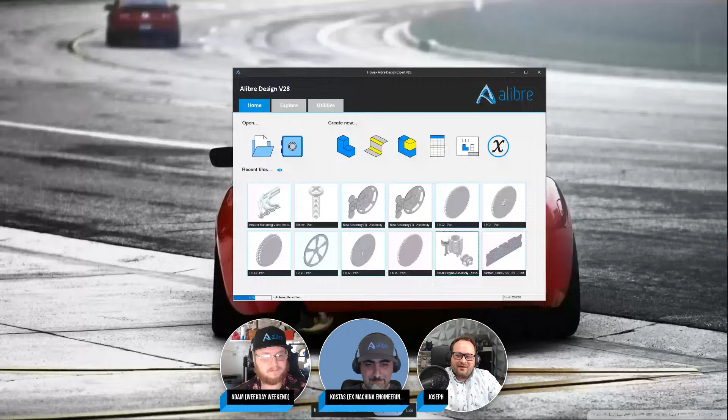Love that one. Let me turn off my phone, and also share my screen, unless you've got a good one, Adam. Either way, nope, you are the surfacing king. Well, here we go, pulling up a model here. I'll pull up a model of a simple engine. With all my streaming on my machine, it's running a bit slower for the first startup here.

Well, anybody heard any good jokes lately? The one I told in the last stream wasn't quite as funny as I'd hoped. I don't know if it's family friendly, but I can give you a machinist joke: a machinist walks by a hole and he says, 'I tap that.' I have jokes, but that's fine. The ones I have are a little inappropriate, let's say, not exactly brand appropriate.

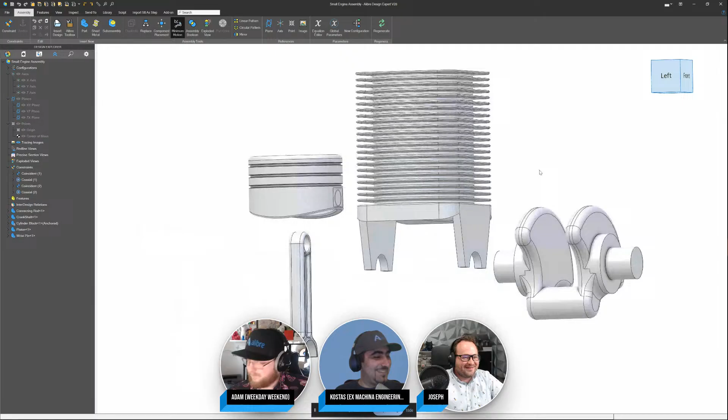While this loads here, I want to ask the chat. I saw Sweden, which is an interesting spot. Anyone else from anywhere cool? I'm here from Crete, Greece. There you go. I take that for granted. You should, as well, you should. Crete is awesome.

Okay, I finally got this up here, so enough stalling on my end, right? If I start building constraints on this, and of course I just go click the wrong edge, so if I start adding some constraints where I click some simple things and I go to position something, there we go.

Let's pretend that when I move this crankshaft in place, I've got some conflicting surfaces. One thing I can do is when I select a surface, and if this is blocking me from selecting this surface, I know it's not, but we're pretending it is, I can right click and hide, and that stays selected so I can still apply that constraint. Then when I'm done, I can simply unhide and get that constraint. So that's kind of my go-to way of getting around when something's in the way. Hopefully that's helpful, let me know in the chat if you guys have any other approaches as well.

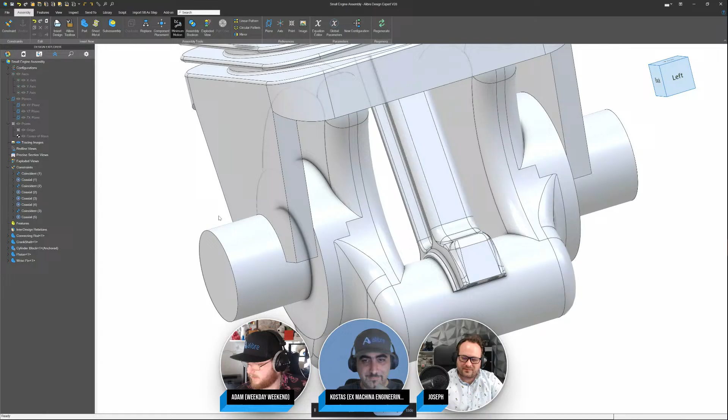No, I think that might cover it. Let us know if that helps you, if that answers your question.

Yeah, because this is such a common, ubiquitous thing, right? Sometimes things just get in the way of other things in an assembly.

Can I also just say the trick that I use to select behind? So actually, it's just simply changing the view to shaded with hidden edges, right? That also works in assemblies, but if it's very complicated, it makes the assembly a bit hard to see.

But if you've got an assembly that's got a few parts, and they're large parts and whatnot, and you just want to select an edge for a fillet or whatever, you can just change the view to shaded and all edges - that's the terminology. You can even use that to select through in assemblies. So that's a cool trick.

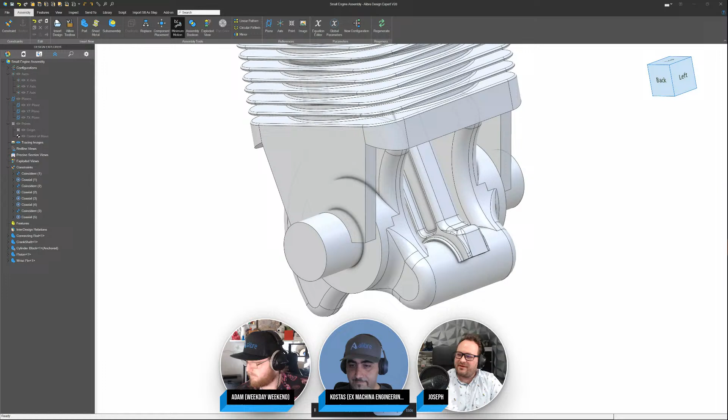That's awesome. I just noticed we've got Michael Berglund, 25 years with Alibre. Yep, that is amazing. Really cool to have a partner with us on here. Maybe you can help us answer some questions too. But thanks for joining, Michael. Let's see, we got Switzerland, Minnesota, North Carolina. Sweet.

All right. Any other questions or things that we can address?

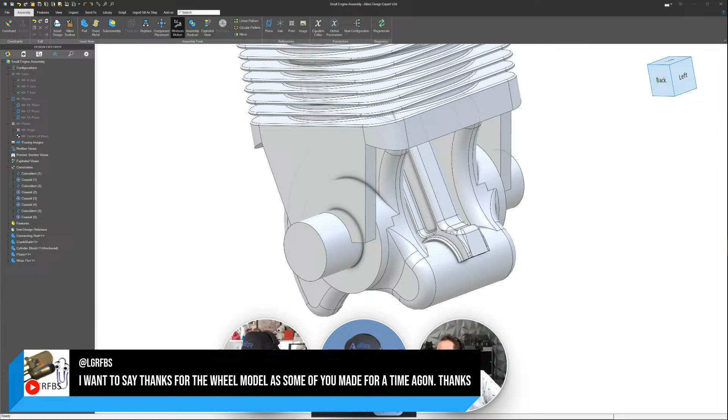Yes, I think, if I can just hijack this - that's a very interesting question, right? Yeah, and I'd love to answer that if you would allow me. So the question is, what's the most efficient way to create a rectangle with equidistant side edges from a center point in a sketch, right?

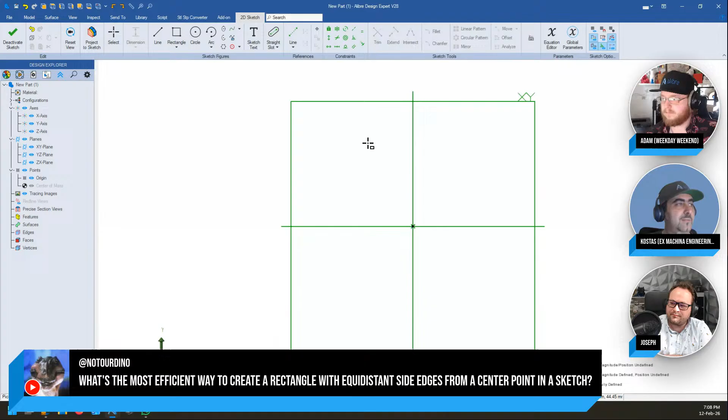Well, first of all, if you've got a sketch, you can definitely use the center rectangle, which will by definition do what you want, right? If the corners are equidistant and it's a rectangle, the sides are also equidistant. But there's another way, and it's a great little tip.

It's to use the midpoint constraint. That's that one up there. You can use it instead of using it to define a point as being the midpoint of a line or an edge or whatever. You can actually use it with 3 points.

And the way that it works is the first two you select, you can see you've got a little prompt down here. Guys, when you're working, always take a look at the prompt on the bottom left corner. There's some great useful information there, whether you're dimensioning or using any tools in Alibre. So it says select the first point or a line.

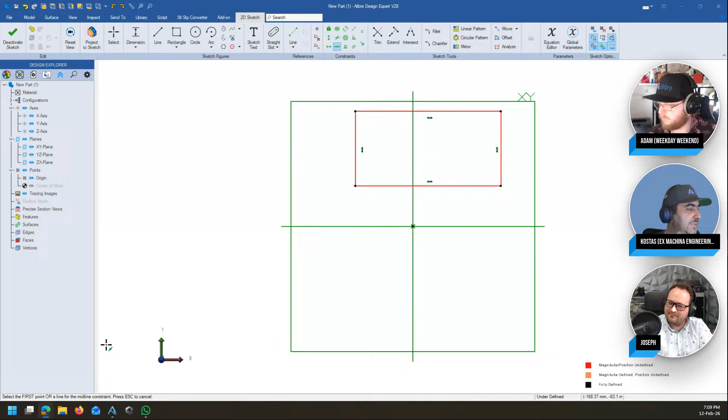But look at that - if I select 2 points, now I have defined a linear segment, right? And then if I click on a third point, what happens is Alibre internally calculates the perpendicular bisector to that linear segment and makes sure that the point I selected is on there. So you see now that I can move these points and they stay sort of symmetrical to that point.

Now, if I also do that for these side points - sorry, I hadn't selected it. Okay, let's go again. What I have now is the center rectangle, right? And I've got sides that are equidistant from that middle point.

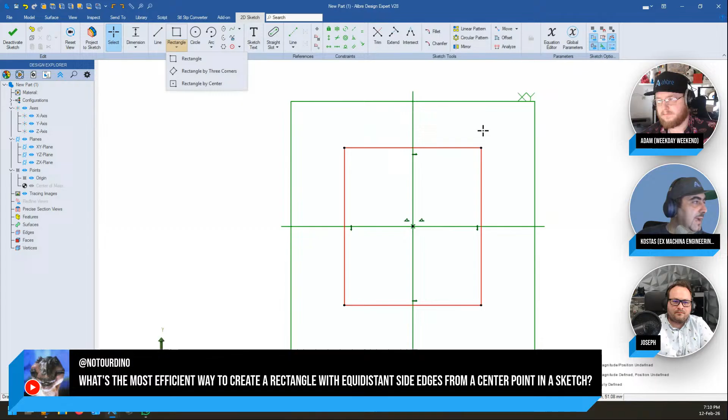So I know that ALIBRE Atom, for example, which is the budget option of ALIBRE, it's less than $300, does not have rectangle by center, but that's how you recreate it in ALIBRE Atom. You do a normal rectangle, and then you go midpoint constraint, and then again midpoint constraint. There you go - center rectangle.

I hope that helped, that's a really nice trick. That is a good one. And symmetric works, but I'm really liking the midpoint thing that you're showing. This is awesome. It's got more potential, right?

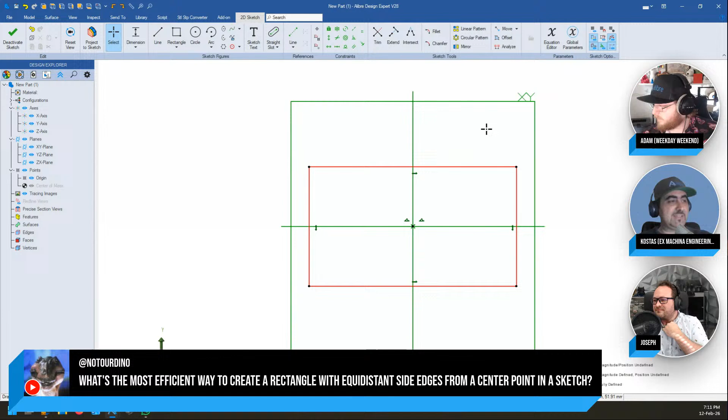Because it depends on 2 points, so it doesn't need to be - it doesn't even need to be symmetric with an existing line or whatever. It's just a single point in the middle of 2 other points. It's more versatile, is what it is.

Absolutely. I'm seeing a question here - is the stream every week? Looks like it was answered, and it's true, every other week. So we'll be on here. We strive for the same time at the same place. So be sure to catch us.

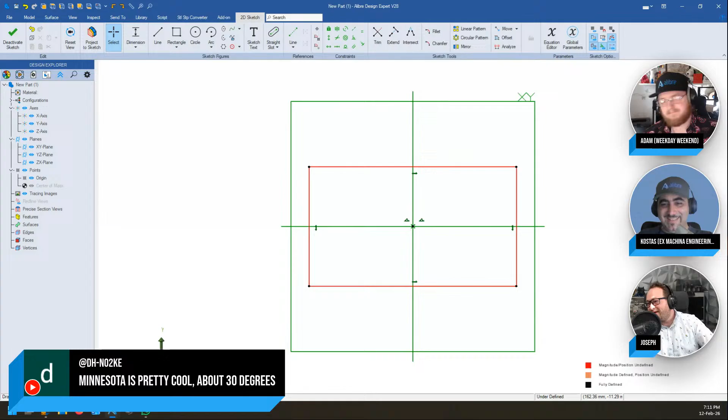I've got someone here from Minnesota. I got to say, I've got family in Minnesota. They got a house in Minnesota, another house in Florida. They like extreme temperature changes. And when my cousin was very young and they were moving to Minneapolis, he said, well, we're moving to a place with very small things - they have mini apples and mini sodas. So I just had to share that.

I'm seeing some - so is that, by the way, the same machinist that we were talking about earlier? No. Okay, never mind, never mind.

I like this one - when should you use anchor part and when should you not use it? Do you want to take that, Joseph, Adam, or should I? You can grab it, however Joseph can. Yeah, we're on your screen. Let's do it.

Okay, so when you should use anchor part and when you should not use it. So the idea is this.

Basically, and I've got a token assembly here. Again, don't tell anybody you saw this, right? This is between me and you guys, right? But live stream exclusive, live stream exclusive.

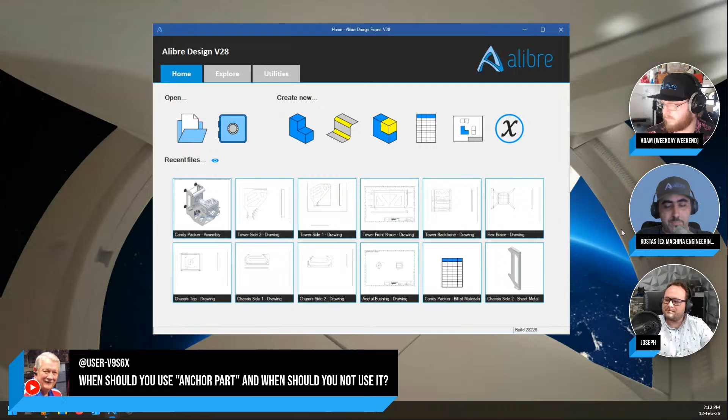So don't tell anybody you saw this assembly. But the idea is that when you have a part that you know is going to be stationary, right, and it's one of the initial parts of your assembly, and it's a very basic part, then it's a good idea, and generally speaking, you can use anchor part on it, right?

On the other hand, you should know that anchor part, and that's basically what I want to say, right, and what I want to bring your attention to, you should know that anchor part is evaluated alongside the assembly constraints.

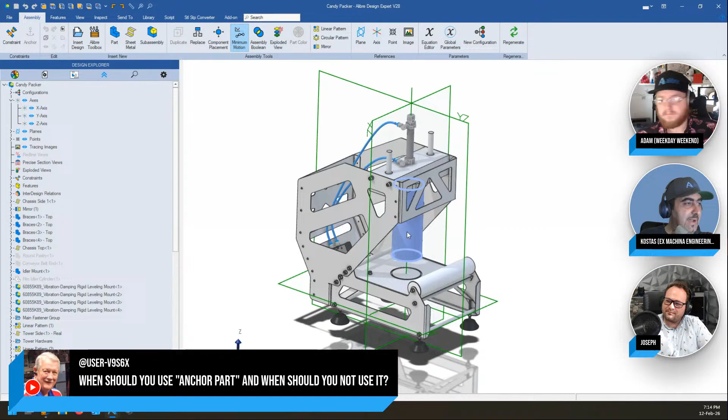So if you've got an assembly that's got some motion in it, right, and you need to check that motion, and you need to account for it, and maybe even get some measurements off of it and all that, it does pay to constrain your parts, because that will create fewer constraint collisions, restrictions, errors down the line, right?

So my working advice, what I've found working with ALIBRE, is if it's one of your very first parts and you're completely sure that it's never going to move and it's never going to have any kinematic properties, yeah, you should use anchor part on it. But if you can take the time and constrain it properly, it's slightly better, right? So I hope that helps.

And if you guys have some more input, please go ahead. Only thing I can think of is that depending on what you're doing, it might even just be better to take the extra 2 seconds and constrain it by aligning all the same planes. Might also be just a little bit more robust. Yep, if you have to rotate your part, then you can change which planes are aligned with which, and so you can get a nice rotation that way.

Yeah, if you don't mind, I'll jump to my screen real quick. Just on that note, we'll go to Insert Design, and I'm just going to insert a random part here. Now, if I hover over my origin, you can see that I got that little red dot symbol there. That means that all the planes are going to be aligned.

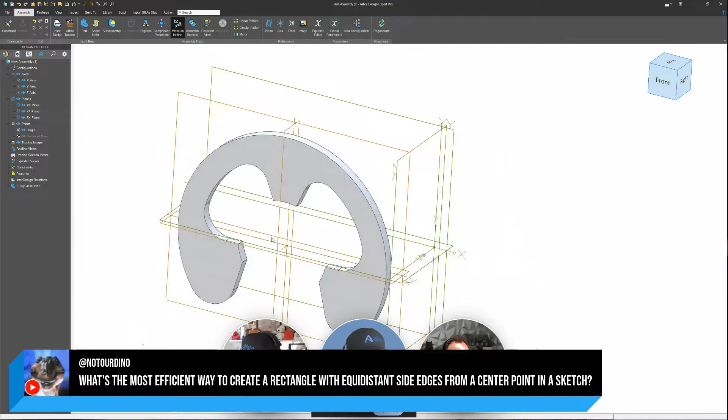So if you need to do mirrors in the future off of your initial part, right, that's a great way to make sure that your planes are aligned around the origin to do mirrors properly. And then if we just anchor the part, we know that it's anchored around those planes. But as we said, it's a lot more preferable to align it other ways, because it opens the door to simply change things if you need to.

Hopefully that was a helpful addition.

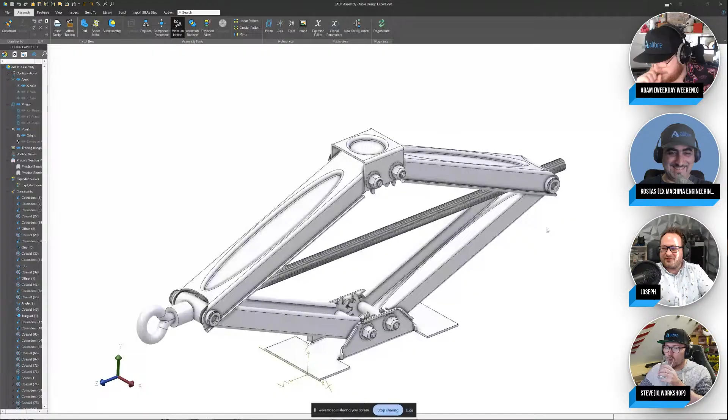So here I've got a lifting jack, and as I twist, it lowers and raises, and that is due to a mate that we would have, like a mechanical mate or a screw mate. So it twists as I move things. And this is available in Expert, I'm pretty sure, not in Professional. So if you don't see that mate, that could be the issue. Let's see if I can hurry and replicate this mate here.

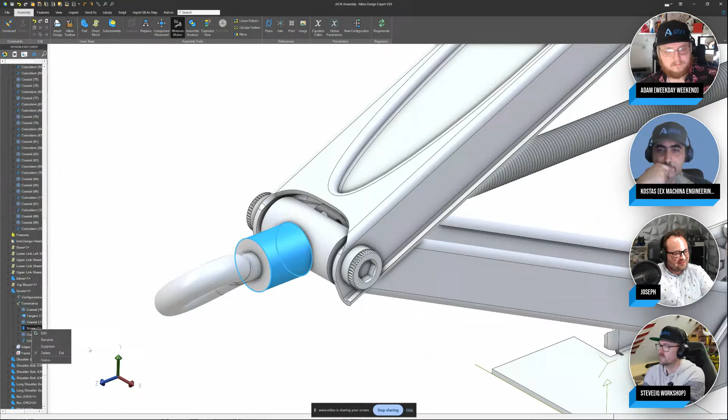I'll show in Explorer and go to my constraints, right? So here's a screw mate that I'll suppress. And by the way, if you ever need things to thread properly, if you're very particular, you can suppress the mate, and then you can adjust it to where it's going to fit properly, the right amount of turn and everything, and then you can unsuppress it, and it'll be right on track. I do that with gears a lot. If my gear teeth aren't aligned right, doesn't make a bit of difference, but it's much nicer to look at.

So, see, I would leave that sort of stuff in so that the gears didn't mesh properly, just to trigger people on purpose. I do that as well, Joseph. There's some fun with that too.

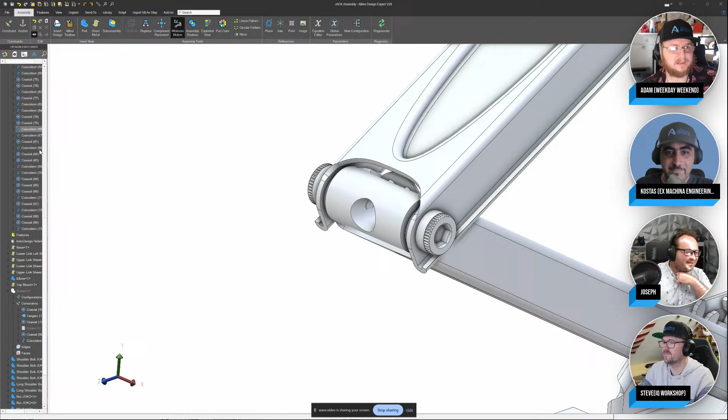Kostas, I think you're muted. No, I can hear Kostas. Oh, I can't hear. Well, I'm not muted. Let's make sure you have director's voice on here. Anyway, I just wanted to say that I also do that. You in the chat, can you folks hear Kostas? Let us know. You might have to refresh your browser. I've had that happen before. Let me refresh mine right quick. There we go. Can you hear me now, guys? Yeah, I could hear you all along. Okay. And now we've got 4 bubbles. Greece is not that far. England can hear me because it's closer. So maybe I should start yelling with a big megaphone. Definitely do it. Yeah, stranger things have happened.

So to apply a screw mate, we'll go to add a constraint. I click on the mechanical tab right there, which is available in some versions and not others. And we choose the 2 geometries. And I actually think I need to choose an edge here. I have not done a screw mate in so long. So this is good because we're all getting refreshers too. So yeah, I need a refresher here because my screw's grayed out.

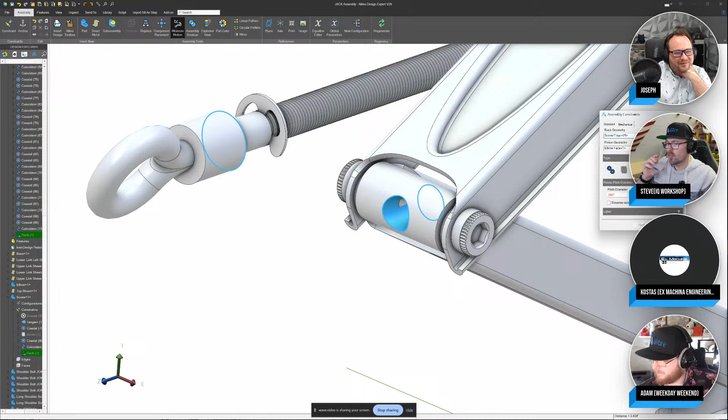All right. What am I doing? I'm glad I'm not the only one that has to refer back to one of my own videos to figure out how I did something. Oh my gosh, yes. There is a fantastic Basics of Assemblies video on the official ALIBRE channel, by the way. Yeah, apparently watch my videos, not me live. That's way better. We can safely say that Joseph has forgotten more things about ALIBRE than we will ever learn. I'm going to wrestle with this. Do we want to move on to the next question? Okay, let's see.

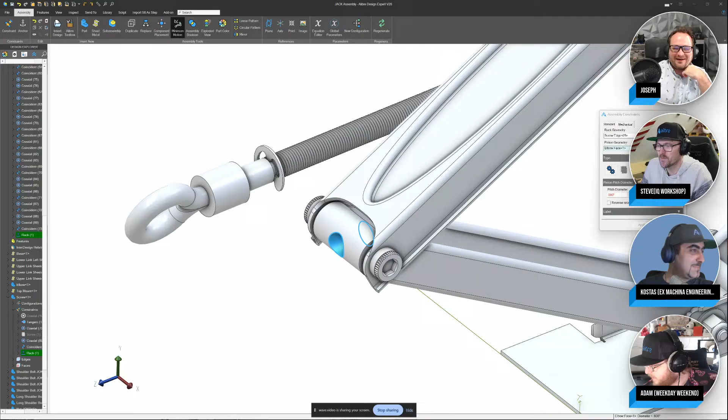We've done that. Okay, Kostas, this might be one for you here. You've done a lot with importing and exporting. This guy's asking: don't know if you all have any experience with SVG or DXF importing, having trouble exporting a file that imports easily. So yeah, sure. Let me find the file that I used for my latest video, actually. It says exporting from Illustrator, but if there's a better program or format that easily imports, you'd appreciate it. Yeah.

Okay, let me see. So I've never used Illustrator. What I use is Inkscape, right? It's a sort of open source alternative for it. It also works in Linux. It's amazingly powerful. You know, the more I use it, the more stuff I find out about it. It's a great piece of software, right? And I've got it up on screen now.

And so in my last video, I did my homework, which you guys have yet to grade, actually, right? You should grade. I'm still waiting for the grade report on my homework. So for that homework, I needed to get some female hair on a dummy, right? Don't ask why. Go and watch the previous live stream. Too long a story. Steve's laughing. Don't laugh, man. This is serious stuff. It's homework. Homework's serious stuff. It can be fun. Yeah, it can be fun. Yeah, sure.

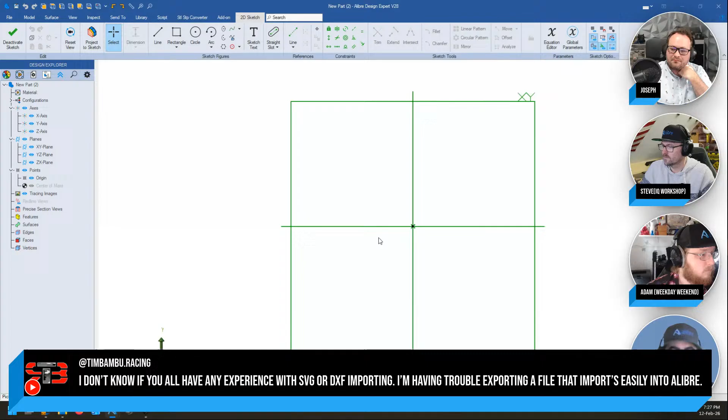Okay. So what you do then is you open a part in Alibre, and you can import that SVG. The thing is, you need to open up a sketch and then import the SVG. Maybe you already know that. So we go into our part and we start the sketch. And now I can right click and I've got the import SVG option down here. And I will go to the folder that I saved it at, which is this one. And I get this menu. Let's click OK for now. It takes a while because it's a bit of a file. That particular one had too many corners, but it will eventually come in, and it will come in as a sketch.

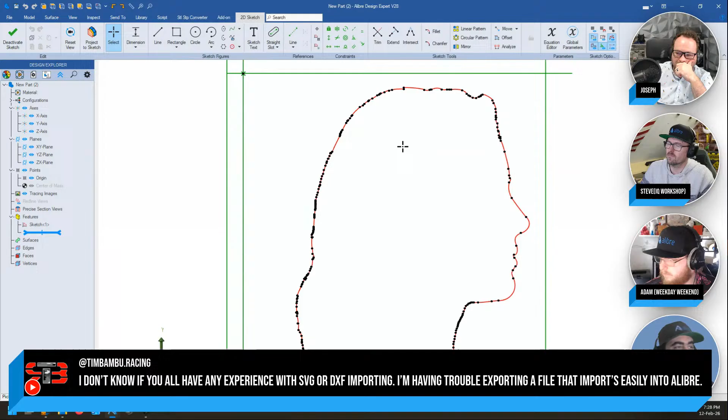And it's worth noting that, oh, come on, where is it? Highlight it in your view. Oh, there you go. The sketch is turned off, and I accidentally closed the sketch. So what you should know here is it comes in as a completely undimensioned and unconstrained sketch, right? So this is not fully defined in any way. But if you did the work correctly and there's a single line in there and nothing is overlapping and you don't have double geometry and all that, you should be able to extrude it straight off of the sketch, right? So there you go. Go on, Kostas. Keep going. So yeah, I just want to say that this is the workflow to get an SVG into 3D.

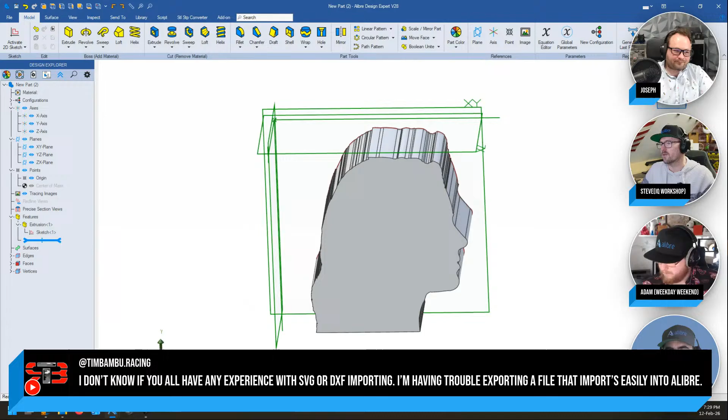So I was just going to complement what you were saying in that various different applications deal with vector files. Even though an SVG has a particular standard and a DXF has a particular standard, every application, whether it's Adobe, Corel, or Inkscape, handles vectors and points very differently. And Inkscape, I have found, as you pointed out, is very reliable as an intermediary application. If you're having trouble with a file, it'll load it up, and if you resave it as DXF or SVG, you very often find the format that Inkscape outputs is more universally accepted. Yes, that's true. I mean, my laser cutter is using a very old piece of software. I think it's LaserCut 5.3.

And anything I output from, I mean, the software looks like it's out of 1995. But if I try to export anything from Illustrator or anything like that, it hardly ever comes into that software with any degree of accuracy, and there's spurious lines, there's all sorts of noise. I just load that into Inkscape, save it as a very early DXF format, like pre-2000, pre-R12, I think it is, and it just loads up into the software fine. So Inkscape is really good as a translating application in the middle. Yeah, it actually has gotten me out of a tight spot on more than one occasion.

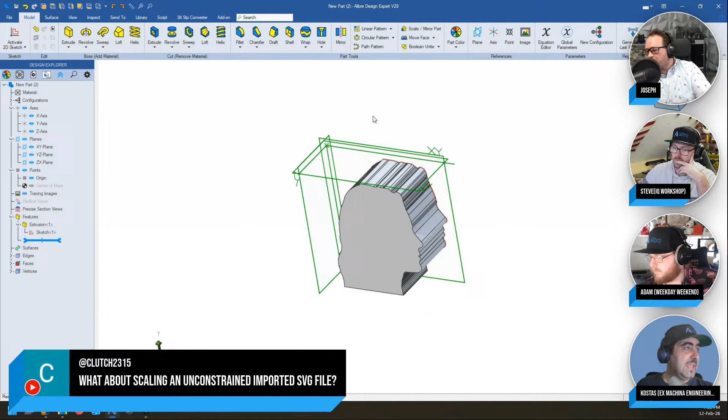So what you do is you get a 3D shape out of it, and then you scale that, and you do that through here, right? This is the menu. So let's do, I don't know, scale factor 3, for example. Okay. Uniform scale. Now, if you don't need that 3D file, you just want a sketch to do something else, and you definitely don't want this 3D shape in there, you can go into Surface, which is available, I think, only in Professional and Expert. If I'm wrong, correct me there. And you can convert solid to surface, right?

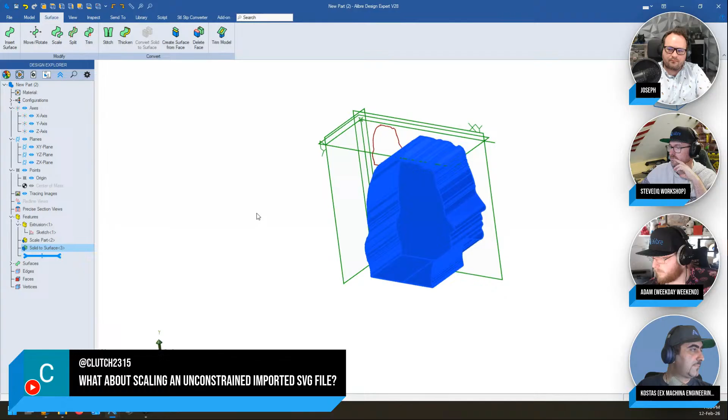And then you can delete this surface, right? No, wait. Oh man, I tried to be Joseph and it failed. You're doing great. Maybe delete all of the faces? I don't know, there's quite a few of them in there. Delete face. Maybe that'll work. Yeah, that'll take 15 minutes. Oh, come on. Go Alibre.

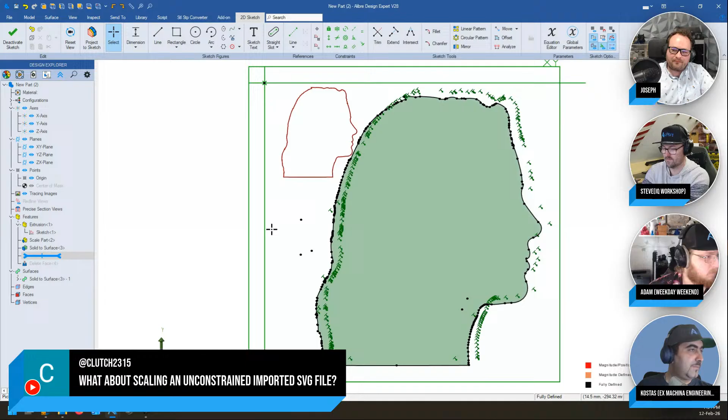So now, and this is parametric, I can go back because I forgot to do what I wanted to do. So now I can start a sketch, and I can project the scaled surface. And that is going to take a while because there are thousands upon thousands of little points in that one. Yeah, there you go. I exit out of the sketch, and now I will go and delete face. So now I've got the scaled sketch, and I don't have any other 3D geometry messing up my design anywhere else. But that's the way you should do it.

You should not be trying to scale the SVG or the sketch right off the bat. If you've got a super simple import, which probably doesn't apply to anything, but if it's a circle or a square, you could probably go in the sketch and do offset entities to save some time. But you'll get big distortion as your shape grows even moderately complex. So that's a very limited scale where that would work. And this is a great solution.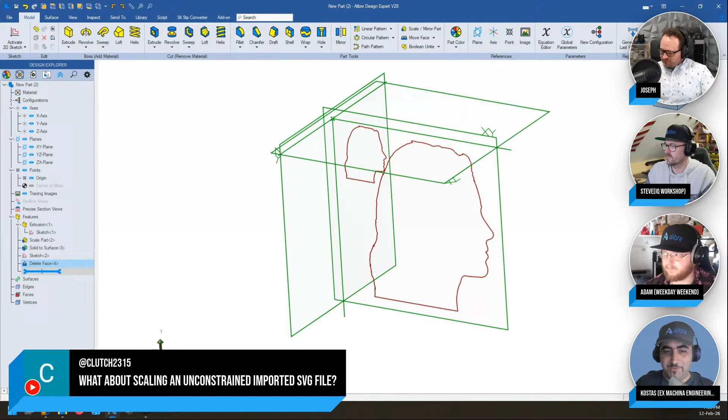Let's see. I've got one possibly. There you go, Adam to the rescue. Right, I've got a really quick one for Joseph here. Where can I see more of that steam loco design that shows up in the intro? Oh, that's a good question. That was part of our ALIBRE design contest, and I don't know if we have the rights to distribute that, but it's a really cool one. You can probably see at least some more information about it on the ALIBRE website, though. It is, yeah, and you can also find a ton of pictures of that model and detail in the gallery section of the forum. It's got some great renders, some great pictures. It's an amazing model, by the way.

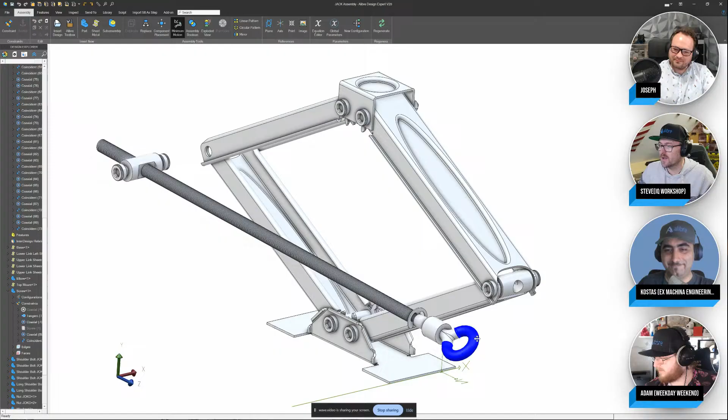I'm not sure who made it. I think I know, but I'm not going to mention it because I don't want to get it wrong. But this thing is designed down to the very nuts and bolts, right? It's an amazing model. And the fact that it's on the forum means that if you wanted to ask questions about it, you very well could. And the guy who made it is very active in the forum. So there you go.

And I figured this out, guys. The faces that I was clicking were going to be a potential over constraint on the assembly. So that was all that was. So, yep, we click a face, we click another round face, and then with our threads selected we can establish a pitch. So just a real minor thing. And I put a really, really coarse pitch in there so that it would be obvious.

I'll go ahead and close my dialog and unsuppress that mate. So now when I turn it, there's a lot of movement because I just made a screw mate with a different pitch. So that's how you would do it for a turnbuckle.

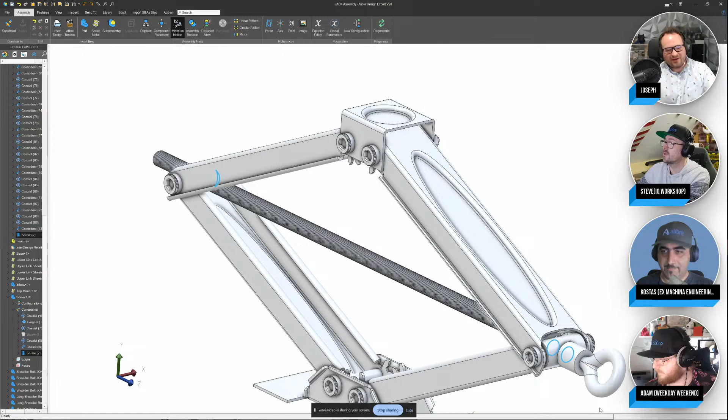Adam, yes, can we grab the question at 5:26 for me? It was literally the one before you selected, about the loco, the steam loco design. I'm not sure whether or not that one would get into the forum.

This one. Yeah, so if you glued a metal rod into a 3D printed PLA part and later you realized you need to remove it, how are you going to do that? So it all depends upon what adhesive you have used on this part. If you have used CA glue or super glue, one thing you can do is soak it with acetone, and that will dissolve the CA glue, allowing you to remove that.

Just be careful using acetone around your 3D prints, depending on the material. It's okay in this case because it's PLA, but if you're printing anything in ABS or anything like that, you need to keep acetone well away from your prints because it will melt it. Also, use a well-ventilated area. 100%. Acetone is flammable, so you need to keep that in mind. All your hazardous material, read the label, right? This is not safety advice, definitely.

A lot of hot glue or super glue can also be removed with isopropyl alcohol as well, depending on what you've got on hand. So I just thought it'd be good to cherry pick that one out. I'm not sure if that would be relevant in the forum or not. So, cool. This is a really quick one.

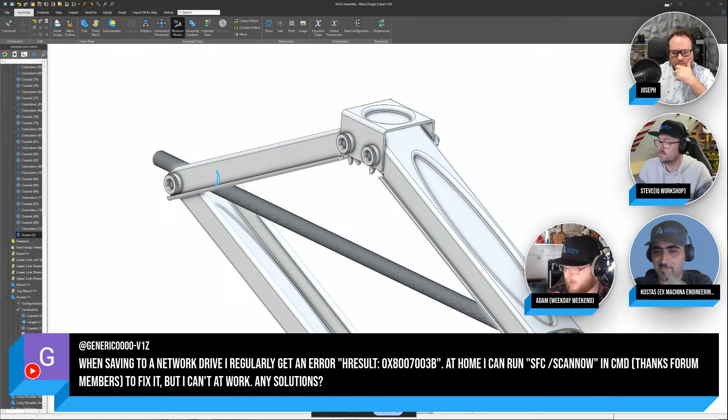I've had that not just with ALIBRE, but with a lot of other software not liking things from network drives. I completely get not being able to open a command prompt on a work PC. You might also talk with your IT guys and ask if they can take a look at your OS. Maybe if you tell them your PC's running a little shaky, they'll be willing to run that for you.

Absolutely. I'm going to see if I can get that locomotive on my screen here, just so we can view it at least. And while you do that, can I just answer this question here by Silvio Z?

Can ALIBRE handle mesh, just show mesh in the background to help for design? It doesn't work exactly like that. But we have covered STL import quite a bit in previous live streams, and you can find a ton of resources in the forum. Basically, what you do is you can import the STL.

There are applications, and there's a great plugin by David, Bolsover is his forum handle. He's made an absolutely epic add-on, which first converts the STL into a STEP file and then imports it into ALIBRE. And then you have a solid that is based on that STL. Now, of course, if you have any round surfaces or edges, STL will lose a bit of information there, right? It will interpolate it with straight lines.

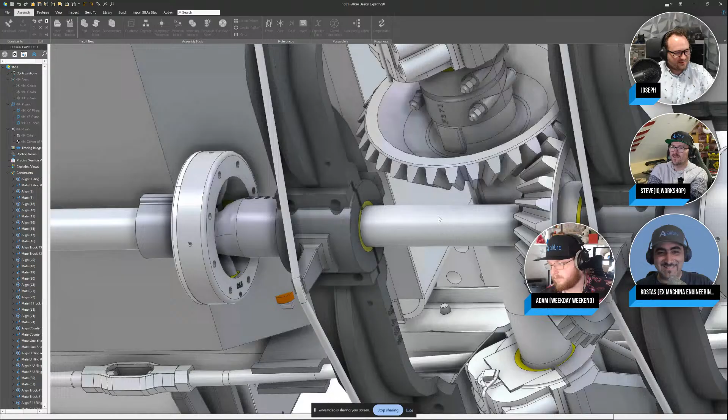There's all my screen rotations catching up to me. Still in process of opening this part. There's so much going on here, which is pretty common in any platform of this scale. But the detail is so amazing here. That's twice in one stream ALIBRE's impressed me now. We'll check the showcase and see if we can add this in, because what an interesting part. It's just so realistic. It's amazing. And I cannot begin to imagine the time that it took to do all of that. Right? Because it's not like, oh, I'll get the shape right and that's it. They actually designed it. So, yeah. Pretty cool.

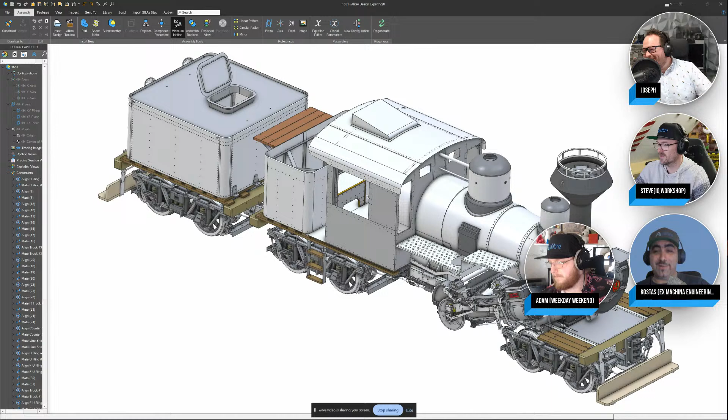It's so realistic that it's one of those things where you look at it and you think, oh, they made it look easy. But it's so not easy. So I'll tell you guys a pet peeve of mine with CAD, right? I know you all want to know about my pet peeves. But still, I'm going to tell you: I see someone saying, I designed a Formula 1 car in SolidWorks. No, mate, you didn't. The Formula 1 car is like 85,000 different components. You just made something that has the general shape of it. And this one is the exact opposite, this model.

Now I think it might be time to fulfill my promise and maybe talk a little bit about Relief Maker. What do you guys think? Yeah. I'm gonna stick in real quick while he's getting that set up.

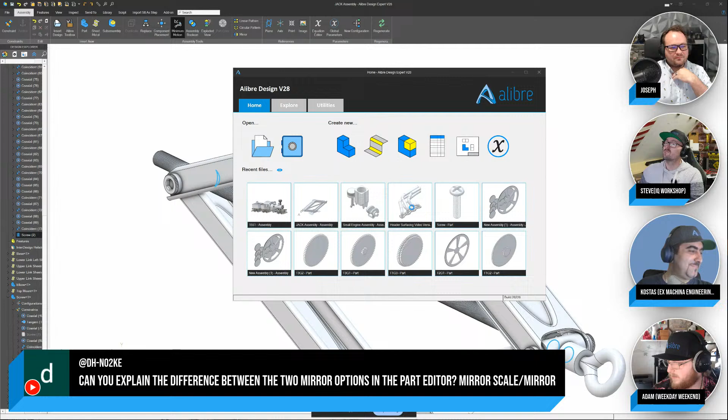Sorry, there's one other question I think we didn't get to. I think Kostas briefly might have answered your question, actually. Two different mirror options, one of them being just mirror and the other being a scale mirror, and it's right in the name. The scale and mirror is designed to scale. So I think he briefly touched on that. But, cool.

Perfect. Yes, I'm still recovering from that big train file, but that's something that might be good to demonstrate too.

In the meantime, I've got Relief Maker. What is Relief Maker? This is something that we have, but it's not part of ALIBRE. It's a completely separate product. Someone in the forums, who is really, really smart, says that we're killing it with the live streams, but what about Relief Maker? So I wanted to address that here.

Bas-reliefs are those things you have, like if you think about ancient sculptures, sometimes they'll have an image that just kind of sticks out of a plane, but isn't the full 3D model. When do we use bas-reliefs? We would use it for things like woodworking. A friend of mine I used to work with in medical had a CNC machine and would make artistic bas-reliefs like this and sell them. He made a lot of money. So that's one thing - in woodworking, we may want to add a lot of detail and make these products with images that kind of stick out of a plane.

Another thing is coin making. Think about all the faces and things on coins - bas-reliefs are really important to be able to do that. How you would model that in any CAD could be really challenging, but it becomes really simple when you have a dedicated software that makes these kinds of reliefs. Jewelry is another one - if you need to make rings or necklaces or things like that, you can certainly do it. And in general art and sculptures as well, these kinds of bas-reliefs play a big role.

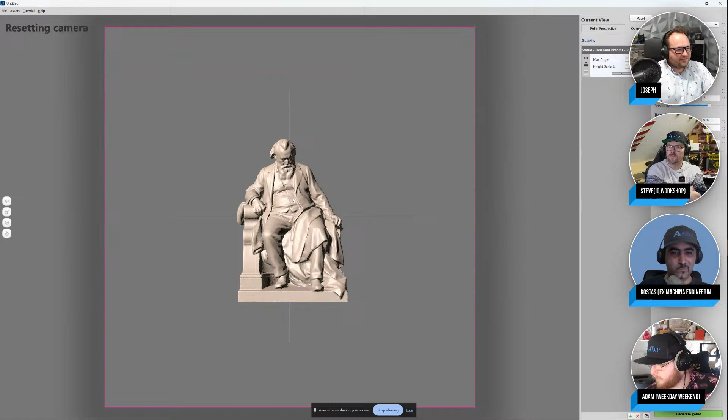So we're going to add an asset from a file, and I think I'm going to go with this Brahms guy. I don't know exactly who he is, but he looks very statue worthy. So we have this STL or OBJ mesh file, and when I create a bas relief, I simply click on Generate Relief. I've got it at an angle that I like, and it makes a bas relief of this guy, easy as that.

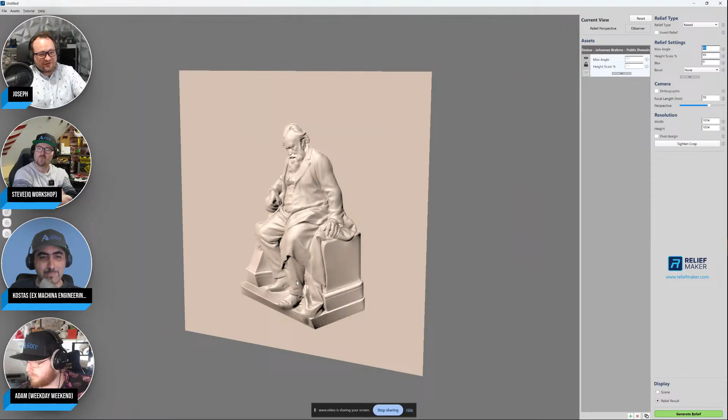Now we have some fine tuning that we can do. We can say, right now our maximum angle between everything, but it's most obvious coming out of this plane, is 80 degrees. So if I were to CNC this, it's pretty much guaranteed to work because there are no overhangs, and I can control the angles between everything, so I can use the tooling that I want and know that it will work.

Likewise with 3D printing, if I change my angle to 45 and I need to print this in the vertical orientation, we can regenerate this relief at 45 degrees, and we can see that there are no overhangs that exceed 45 degrees. We can print this in the vertical with no supports.

So we can fine tune with our different angle options, but we also can scale our height. If I say something like 10%, we want this to be a lot lower, and we look at this from the side, and I generate my relief, it gets a lot lower. So this is almost like coin territory here.

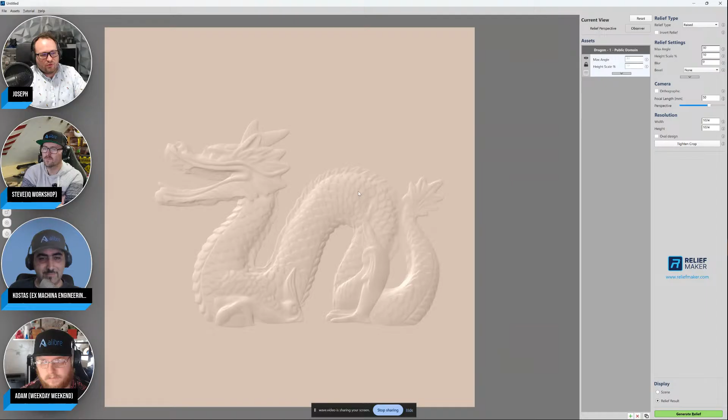Let me pull up another example. If I open up a new file and I add a dragon, this dragon has certain details that I care about. Let's say I care a lot about the scales, and I make a 30-degree max angle, and I scale this to something like 10, and I want this to be very flat. As I generate this relief, well, it's pretty good, but maybe I want more detail with the scales, or I want to emphasize certain things.

If I go back to my view, I have a few tricks up my sleeve. The first one is I can say I want to emphasize contours. When I emphasize contours, you can see there are some pink lines around my model - this is what my graphics card has found to be sharp contours that will be emphasized. So if I look at this ear right here, and I generate a relief, there it is - we can see that ear is highlighted with a sharp contour now.

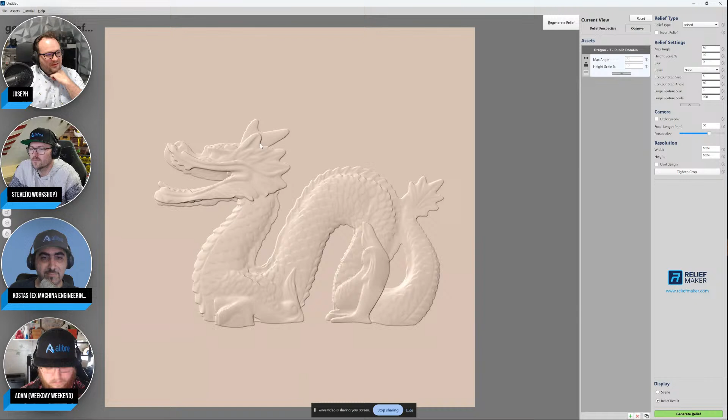You can see a lot of sharper lines, and I can exaggerate that. If I turn this up all the way to 5, you can see just how much we emphasize those angles. So we can customize our relief in that way. We can also change the angle that these contours apply if we would like.

But on to my favorite thing, it's not showing the scales very sharply. Let's say I want a really small offset like this, but I want the scales to show more. This is a really advanced, mind-bending feature. If I draw a line from one corner here to the corner down there, I can say what would be a large feature. I'm going to say anything larger than 2% of the length from corner to corner, so that would encompass all of the scales as small features, and the big features like the head, the whole body, big stuff is large.

And so I can change what I specify as being large or small by changing the number in my large feature size. But let's say my height scale should be something more like 30%, while everything large is going to be scaled at 20%. Well, then our scales are small, so they'll be emphasized more, right? So when I generate my relief, I can make custom alterations like this, and my scales show up a little bit more. Can you see that?

Now we can monkey around with a lot of these settings to get some really fine-tuned bas reliefs in ways that you just won't find with any other software.

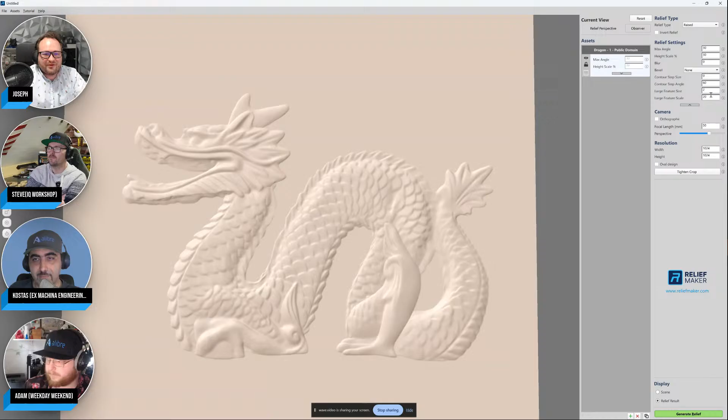Here, when I go to my height scale, if I give this a 60 and generate my relief, we can see that the scales and things show up even more. So I can play with settings like my contours and my small feature versus large feature scales, and things show up a lot more. I'll give this something really crazy just to overemphasize what's going on here, so we scale this 300% for small things. You can see how much more it shows up.

We can add a blur, and it actually makes the solid look blurry. I don't know how they accomplish this, but here comes a blurry dragon. Isn't that wild? Yeah, cool, kind of anti-me because I love my sharp images, but it is cool when you want to apply a blur.

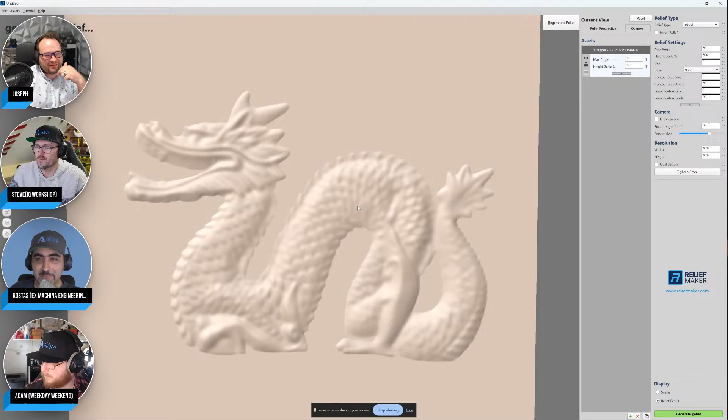We have a bevel effect. So let's make a baseline here - this is without a bevel effect. You can see I can adjust the lighting with my right mouse button, by the way, but we can make a bevel where it kind of stands out of the plane. So if I put a large bevel on there, we're going to see our dragon come out of the plane a lot more. Just like that, you can tell everything is beveled a little bit more.

So lots of custom looks to get from just one single model. We can also adjust our focal length on the camera. This is a 21 millimeter focal length that I'm generating now. You can see there's a little bit of a change there because our camera changed focus.

And then you can change our output resolution. I do like my higher resolution, I'll go 4,000 by 4,000. And then, of course, we can crop it into an oval shape if we prefer that.

So these are things that we can export to a CNC machine, a 3D printer, something like that, and get really professional bas reliefs, whether you're making coins, jewelry, wood decorations, or even Han Solo, right? He kind of turned into a bas relief.

So I think this is a fantastic example of a software that does basically one thing, but does it really, really well. Yeah, it's true - it has lots of features, but you don't have so many features that you're like, okay, how the heck do I use this thing? It looks like one of those softwares where you can download it, install it, have a goal in mind, and get there with very little overhead of trying to learn what you're doing.

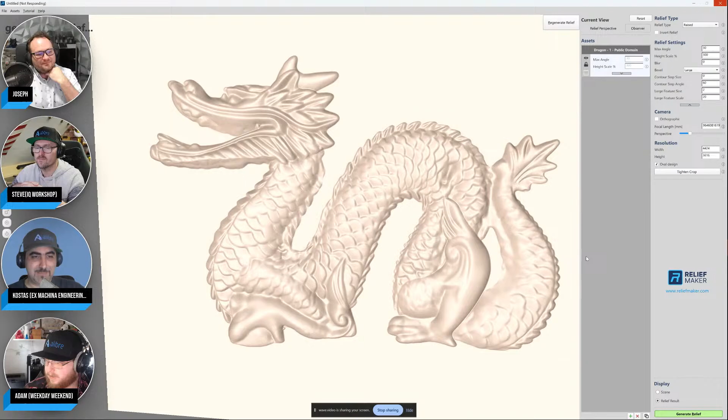So this is great. What about output formats? The live stream is taking up my system resources here, so bear with me a moment. But I do have a question about it - is the only source that you can import 3D models? I think it will take height maps as well, and that's also what it exports to. Great question, I should probably get into that as well.

It will take STL and OBJ, and I think that's primarily what you want to do. But you also can do certain height maps, and it will read a height map, so let's export this to a height map while we're at it. I'm going to generate a non-oval bas relief here.

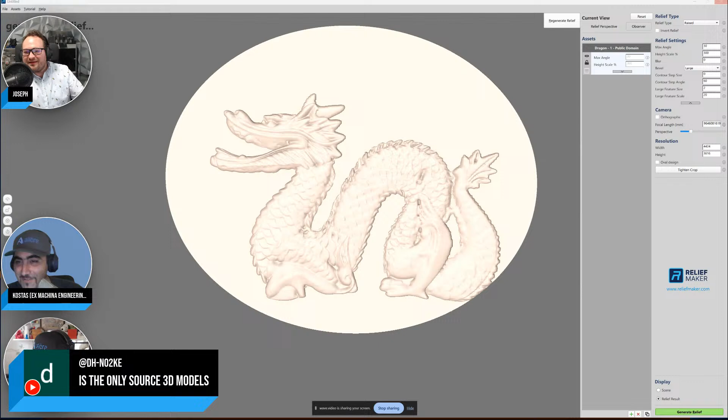Yeah, that's why it ate up all those resources, because you made it an oval actually. Oh, and really ovals are heavy, man. And high res, yes. And the focal length is a few thousand kilometers. Yeah.

I may need to adjust that focal length, but this is what a height map looks like when we export it. You export it as a PNG file, and what is black is like 0, and the closer to white it becomes, the higher the height of it. So you can make a PNG actually start sticking out like a 3D model based on the color. Those are the inputs, and the outputs, of course, are you can create these height maps, and you also can export it as a mesh file, STL, OBJ, things like that. And then your machine can cut out that really cool bas relief you've made.

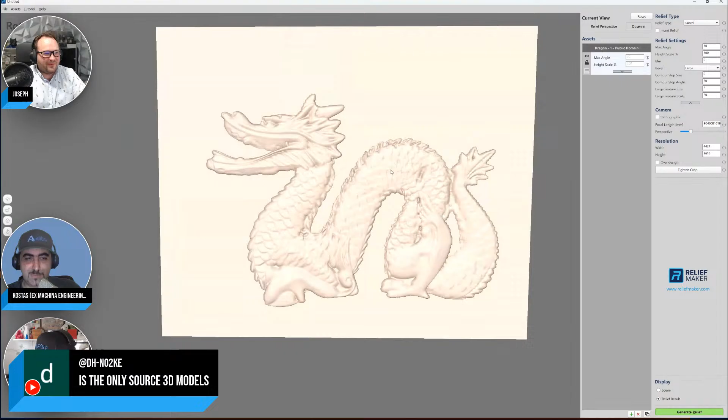Now we've covered raised so far. Let me re-import my Dragon instead of going through my settings again. At default settings, I can create a bas relief as just a base model, but there's some other features as well, such as I can do a recessed bas relief. So instead of raising it out of the plane, it can be recessed in. We'll take a look at that.

So cool, and it's a little bit more vague. Let me up the height scale just a little bit, actually a lot, just to exaggerate what's going on here. And so there's a good recessed relief. There's a slightly different thing that can be done: we can invert a raised relief also to get something that's inward. You'll see it changes a little bit, so you can have multiple options for recessed and raised.

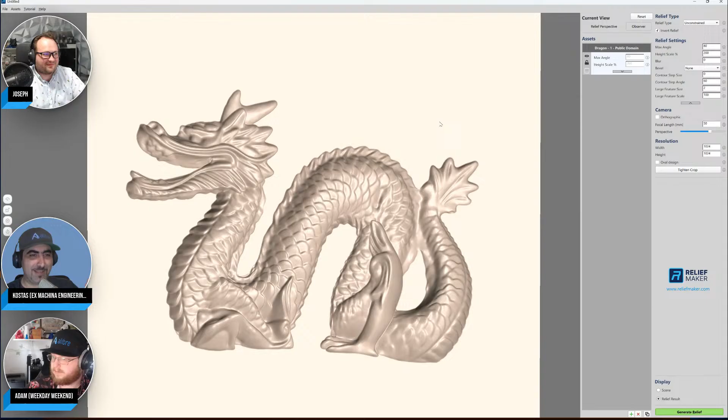One of my favorites is an unconstrained relief. That's great for a kid's toy, right? Oh yeah, for Play-Doh, you make a custom form for it, or for cookies. You can make dragon cookies with this. Oh great, now I'm hungry again. We're back to chocolate, I'm sorry. I'm sorry Joseph, I'm just always hungry.

What can I say? But unconstrained is really cool. This is not the best model to show off with it, but as you can tell, we're going into the plane and also out of the plane in both directions. I think 95% of what people are going to do is raised, but unconstrained is really cool as well.

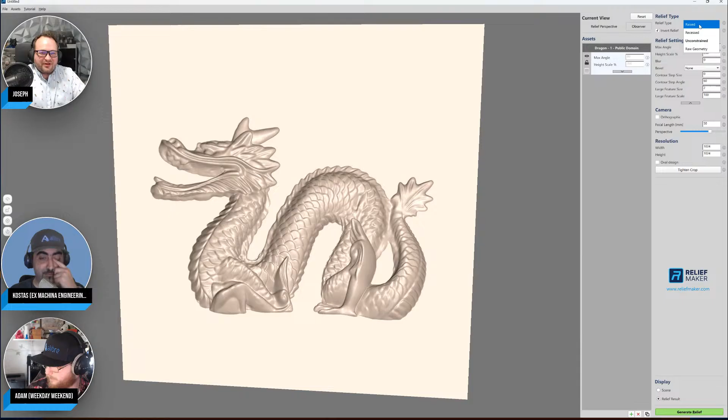And then raw geometry, another interesting one. It's not actually a bas relief. Let's not invert it so we can get a better look. Raw geometry pops out and is not quite what you would expect, but this is when you have something that is completely free of distortion. So if you need to do a bas relief on a coin and have the edges of the coin be completely undistorted and sharp, that is what you would use raw geometry for.

So a number of settings. You can do this with multiple models at the same time. If I go and add another asset from a file, let's go with this Johannes guy again. We can generate Johannes Brahms, the famous musician, actually.

Yeah, we can actually generate multiple base reliefs with multiple models at the same time. They can overlap, they can be brought under and in front of each other and things like that. So the sky's the limit when it comes to making base reliefs in Relief Maker. Hopefully that was a reasonable overview.

I didn't catch the chat. We got a bunch of new chats. Anything interesting going on in there? Are there tools to create a height map from a photo? That I'm not sure, I would imagine there is. I believe there are, yeah, not part of Relief Maker. It's not that easy, though.

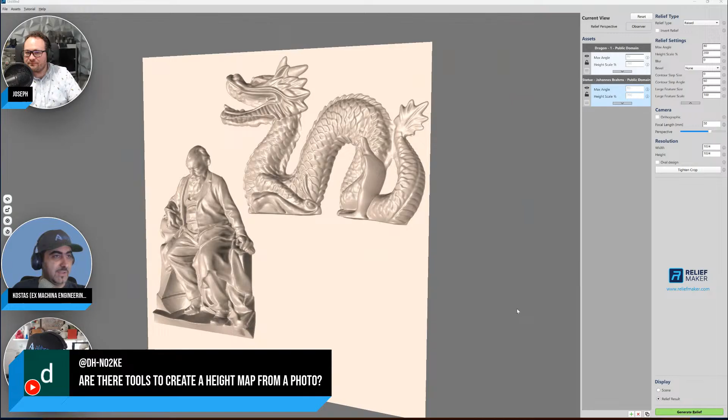I should tell you guys, having studied machine vision in my master's degree, photos have these distortions based on perspective, and the lighting can really also add another distortion. The angle of the lighting creates shadows that go a certain way. So trying to get a height map off of a picture is not very easy. There are tools out there, as Adam Joseph said, that will do a reasonable job, but they're not bulletproof. They need a good picture to start with, or else they're not very reliable.

I would say if you're just looking to do something like a lithophane, you could probably put it through Photoshop or GIMP or something like that, or just any kind of black and white filter. I would mess around with different values to get something you want and try to import that, because as Joseph pointed out, it's just black and white, different levels of black and white that is your height map, and see how that works. And if you're just looking to get something kind of like a lithophane, that might get you where you're going.

I think it's also worth pointing out Relief Maker has a YouTube channel. There you go. And we have one interesting video. I can't demo this live.

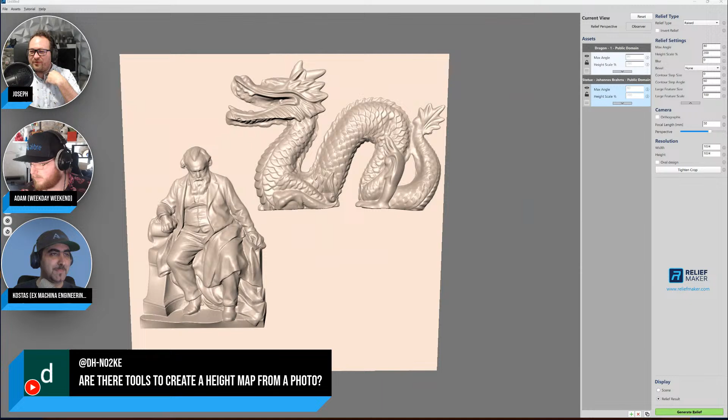Looks like we have Steve back, by the way. Oh, okay, did we lose Steve?

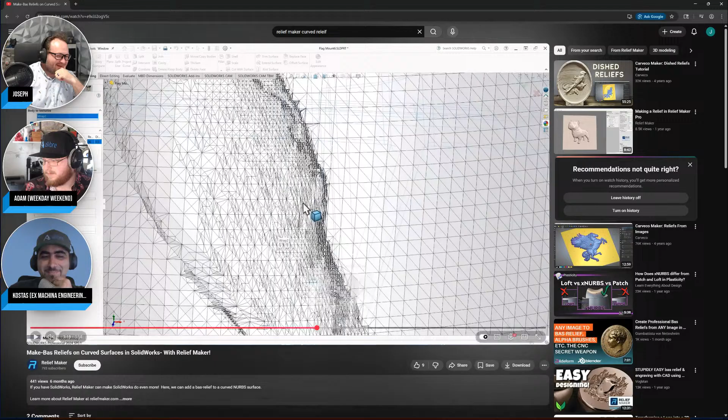So this was a height map that was exported out of Relief Maker, and Relief Maker has really good quality height map exports with multiple options. And so we stuck this on a UV in another CAD platform. It's like SolidWorks or something, I'm not sure. And then we were able to get, it's called, yeah, a curved bas relief on a curved surface. So depending on what software you're using, it's really handy and probably worth showing.

Okay, now you just gave me an idea for a YouTube video for ALIBRE. I can't wait to see it. When Kostas says he has an idea, we got to take that seriously. Yeah. Because I think I know how to get to the same result from a UV map from Relief Maker with ALIBRE. It does go through Blender, but I think the result will be the same.

So let's see. Can you guys hear me now? We can. Yes. Now we can. I think I better make sure that you've got your voice, and then I'll give you the presenter status.

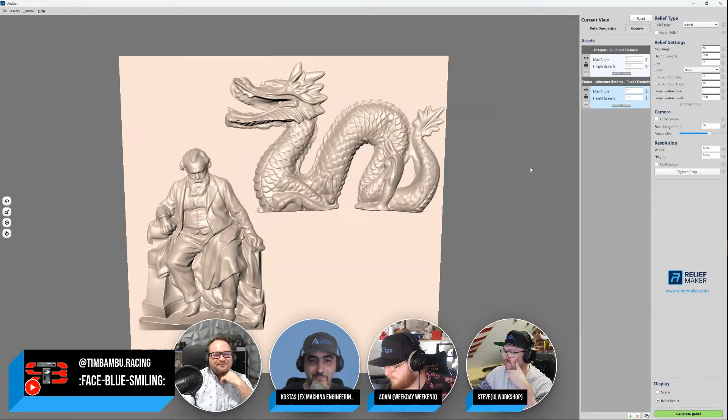Do you have any other questions about Relief Maker or ALIBRE? Where can people get Relief Maker? Yes, that's actually the golden question. Reliefmaker.com. Right there. And then try it free, pricing. And it's very reasonably priced, actually, right?

Because I have a couple of clients that are in the woodworking business, right? I repaired the CNC router for one, and I made one for another one, right? And making large ornamental, like wood, what is it called? Like ornamental sheets of wood. Yeah, veneers, right? So they make a veneer that they put on a large wall or investment or whatever, and these things cost a lot of money, a whole lot of money,

and it's really difficult because most of the time the customer comes and he says, "I wanted to show this and that," right? And it's definitely a lot easier, getting a picture and using those tools that we just said are not very reliable, but they will cut the making time of that height map by quite a bit. And then just put it in there. You get your relief. You export as an STL, and you're importing CAM, and you start cutting. That's not trivial, guys. Right?

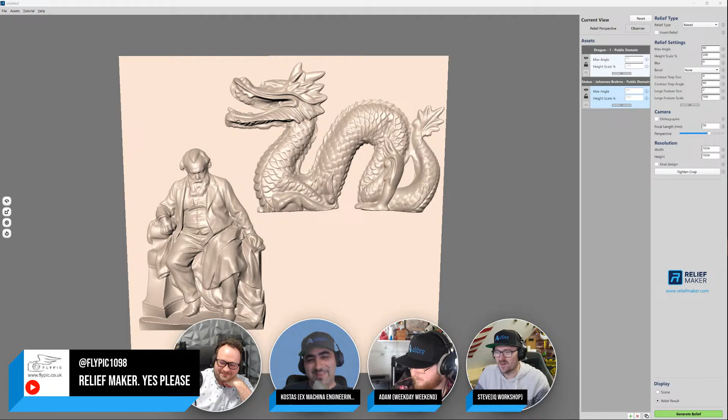Well, do we have any other questions? Is there anything you guys think ALIBRE cannot do so we can do it live on stream here? You're putting yourself on the spot right there. There you go. You either go big or go home, right? I think certainly in my experience, the limitation is on the operator, not necessarily the software. Yeah, but you know what? That's true for most parametric CAD systems, isn't it? Yeah. How you use the tools. Yeah, exactly.

Well, guys, I'm not seeing anything new. I think we got to everything.

We do have another question here. Yes, I love next questions. It says, it appears wrap can only be applied to cylinders. Actually, no. And Joseph has an amazing video on how to get true 3D textures on surfaces in ALIBRE. It is almost magical to watch it, right? To see how he does it. And it does involve wrap and project and all that.

But no, it can be applied to other types of surfaces. The limitation, I think, is that it cannot be applied to more than one surface at the same time. And correct me if I'm wrong here, guys, but that's the only limitation. If it is a continuous surface, it will be able to do it. Interesting. Let's take a look at that.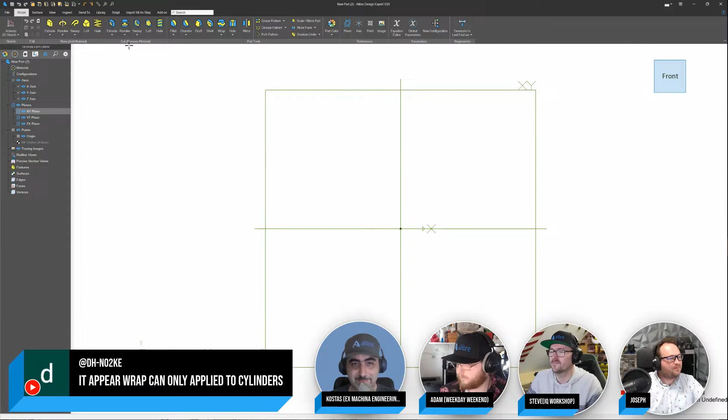All right, guys. Now, Kostas, I have to ask, I'm having a hard time remembering which video you're talking about. Oh, yeah. Again, this is proof, people, that Joseph has forgotten more about ALIBRE than what we collectively know. But there you go.

Yeah, so it's on the official ALIBRE channel, right? And I think it's called 3D Textures or something. Oh, okay. I know what you're talking about. Yeah. That might be good to pull up. 2 methods to make a 3D texture on a complex surface. Amazing video. Guys, it's not even a tutorial. That's just entertainment right there.

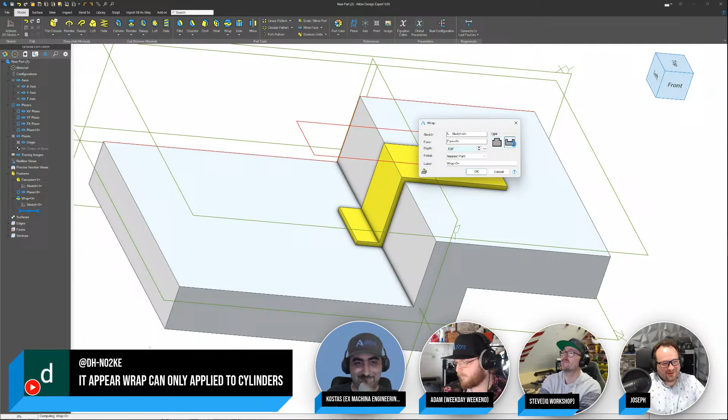So in some cases, we can see a wrap can go across certain faces after you select one. And I think we can remove material as well. Oh, there you go. So let's play with it, because I've also had times when I've had trouble with it. It may be worth grabbing this sketch and going into project. And it looks like project works as well. Project is my favorite because it matches the sketch exactly. And so I was wrong then. There you go. Yeah, ALIBRE is even better than I thought it was. Yes, so to avoid you guys watching me model stuff for half an hour, I will pull up YouTube here.

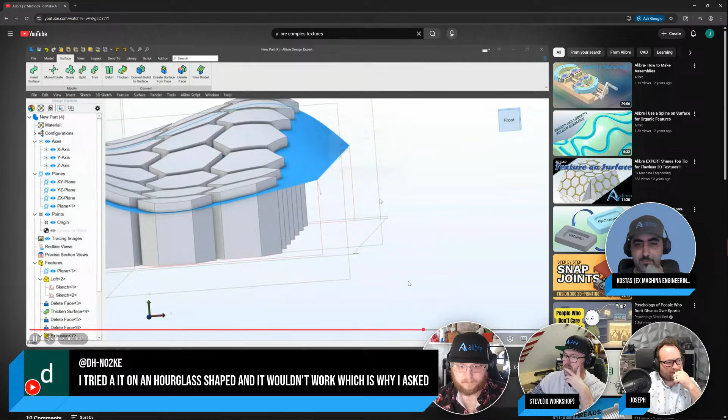So DH, the same guy that asked the question, says that he tried it on an hourglass shape and it didn't work. So I would look at perhaps the format more than anything else. Was it an imported STL? If it somehow was a single surface, could that maybe throw it off? But you can see right here in this video that there are some pretty interesting things going on, right? This is one of the best videos on the ALIBRE channel, for me at least.

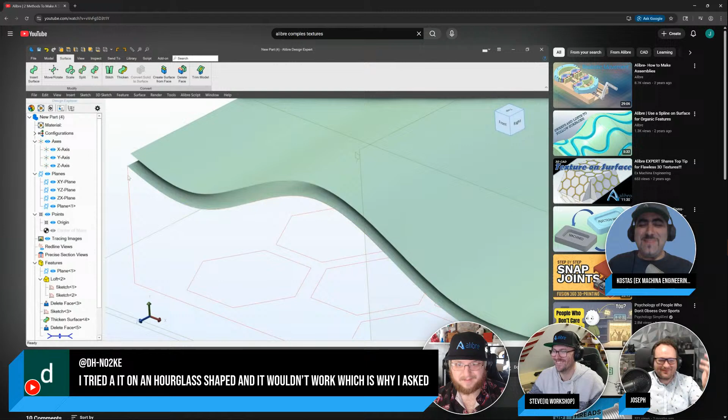Yeah, it looks like here I took a surfacing approach, and so that's one. That's not like you, Joseph. I'm going to become a walking trope of surfaces here. You're the surface king, man. Surface king, and we all know that.

Well, thank you. In this case, I think I extrude through it. I use the surfaces to trim to get that thing. And that was the one method, but you did show another one there. You showed two methods, but yeah, that's a really good one actually. Just a simple extrude and then trim it with surfaces. Yes, there you've used the wrap feature.

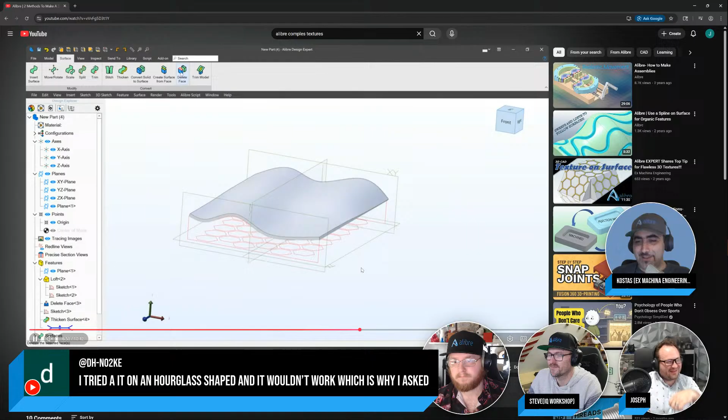Absolutely. So on this side, they're all going in the same direction. So if you're injection molding or something like that, you want all those faces up and down. That's what you said in the video as well. Oh yeah. If you have more flexibility, I think I did a thickened surface over here, and as it thickens, it gets normal to the surface. So yeah, check this video out, and you can see all the little details of me sketching, which is probably really boring. It's not. You grab your coffee and you spend like 10 minutes watching magic, right?

That's it. And you can see one of my videos over there in the corner as well. I tried to do a texture. It's a really stupid way to get a texture going, but it works and it's reliable. My version, I mean. But to get back to DH's question, if you tried it on an hourglass shape and it didn't work, it probably has to do with the actual format. Was it a surface? Did you import a surface and make it into a solid or something like that?

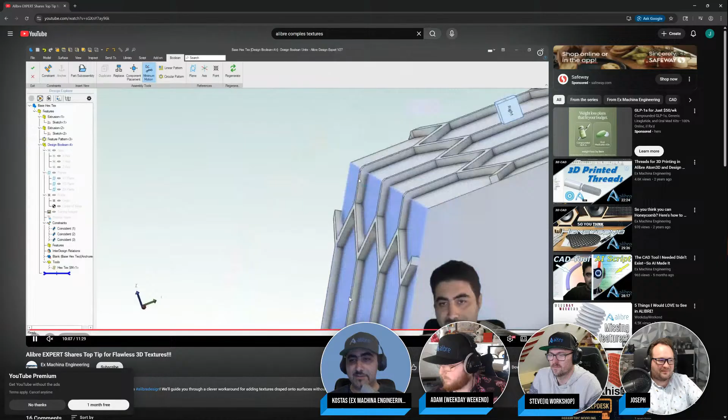Lofts sometimes don't play well with these tools. So you can definitely get an hourglass shape with a revolve, right?

Who's that guy? There you go. He needs to cut his hair.

Here's the thing with this video. You have a consistent hexagon pattern that is not distorted. And so if you want to go distortion free, that is the method. And for that reason, I'm going to say it's not stupid. And so what I do in that video, right, is I make a global parameters file and I drive a solid 3D model, and with the same file I also drive a sheet metal model, right?

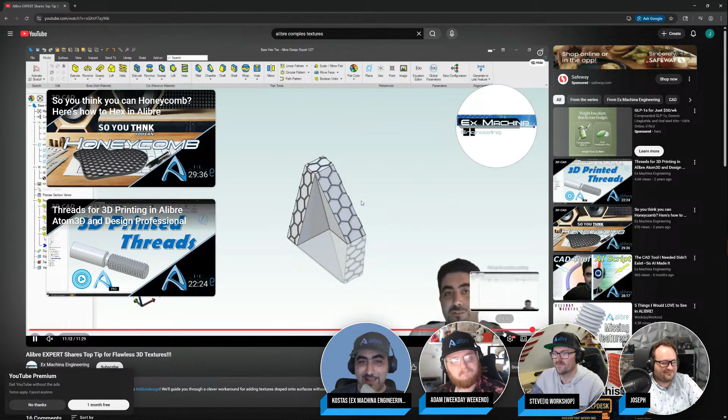Now, the sheet metal model, you can Boolean intersect it with a hex pattern, and then you have a hex sheet metal part, right? And then you do a second Boolean and you Boolean unite it with your solid. And what you get is the pattern curving and following the 3D solid, right?

But the problem there is you're constrained to the shapes that you can make with sheet metal, right? You can have large curves, you can have all that, but it's not a universal solution like Joseph's video. But it is an out of the box solution, if you like. So it might get you out of a bind in some cases. Yeah. That's pretty cool.

Yes. It kind of drapes it on the shape. Yeah. The beauty of CAD is there's probably 10 different ways to solve the same problem, and you get to choose what's best for your needs. Yep. I've been doing a lot of textures, and especially if you have something that wraps around 180 degrees, that method is the way to go, because you can't really do it with the surfacing method at all.